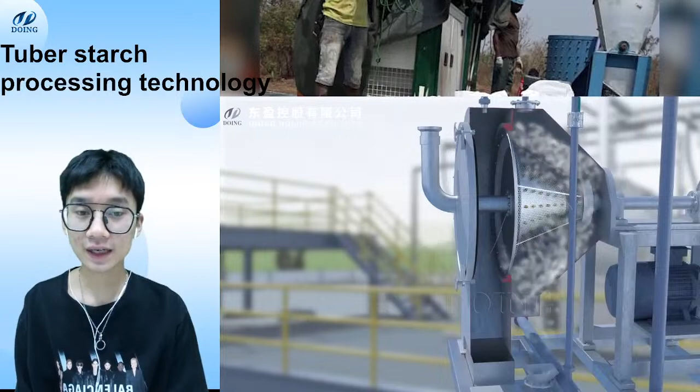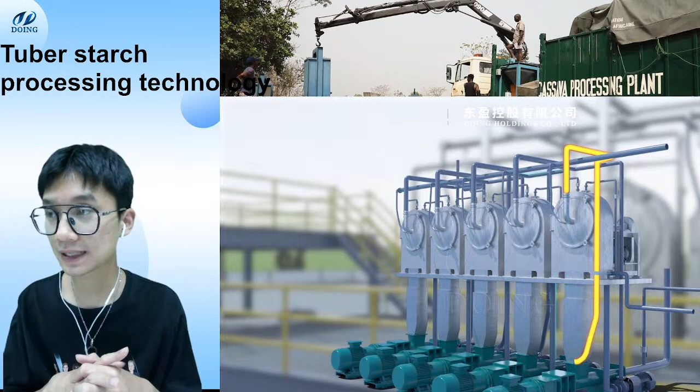Two weeks earlier, we started showing the 3D videos on YouTube. So if you'd like to check the 3D video that we are showing for our newest processing technology, leave something in a comment here, so that our system will reach out to contact you and show you more detailed information about our processing technology, not only for Gari, but potato starch, sweet potato starch, cassava flour or the Gari processing line.

We have done this business for about 10 years, to be specific, 12 years. And during these 12 years, we have accumulated a lot of experience. So if you are interested in our processing technology, please do leave something in a comment. We are waiting for your questions.

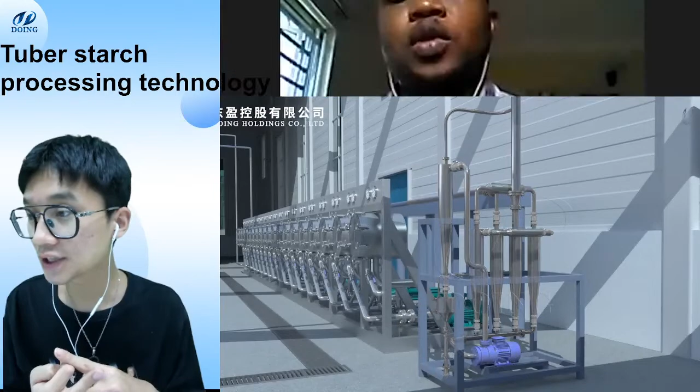And right now, if you are watching the live on YouTube, you can check the 3D video that I'm showing on the right. It is mainly about the whole equipment that we use for this processing technology. If there's anything that you are interested in, you can directly let me know. For this whole processing line, we have it all in stock. For the washing part, the processing part, the impurity removal part, we have it all. And for different raw materials, we do have different kinds of...

Yeah, I am checking the live stream here, and I have already given myself a like. Can I see how many? Hey, Zenram, welcome to the live.

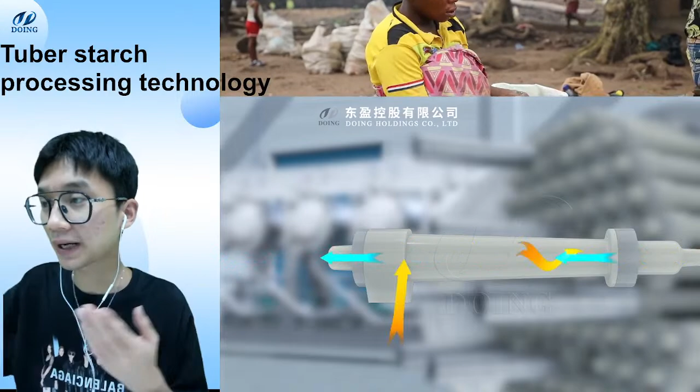This is Oliver from Henan Doing Holdings, and our company is mainly focused on the Gari processing line, cassava flour processing line, and potato and sweet potato starch processing line. So if you are curious about tuber starch, especially potato, sweet potato, and cassava, you can leave something. Our assistant can show you our project cases or the 3D video for our processing technology. We have done the starch and flour business for about 10 years, and we have a lot of experience here.

Could you please tell me what kind of raw materials you have? Potato, sweet potato, or cassava tubers? We can do all of those kinds of business.

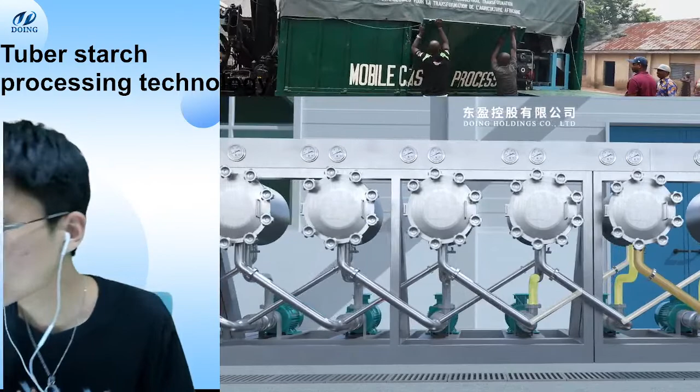And our company is called Henan Doing Holdings, and our company and our factory are all located in Henan province in China. But we do have our overseas office, which is in Nigeria. So if you are living in those kinds of areas, especially Africa, you can save a lot of shipping cost, I'm sure.

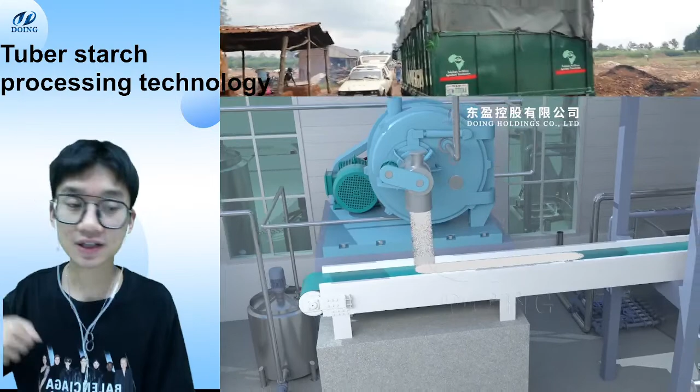So right now, how about we start from the beginning and show you guys what kind of raw materials we have here. Oh, hold on a second. Yeah, this is much better.

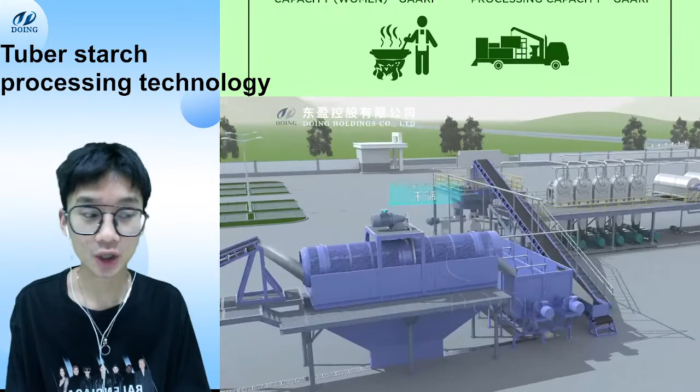Our company is in China, so that's our factory. And we have two factories in total. The total area is about 40,000 square meters, with more than 200 workers producing the equipment for you guys. No matter what capacities or equipment you need, we can provide that.

And this is our check on the right part. This is our cassava starch processing technology, or if you want to know about the potato or sweet potato starch processing line, tell me in the comment area.

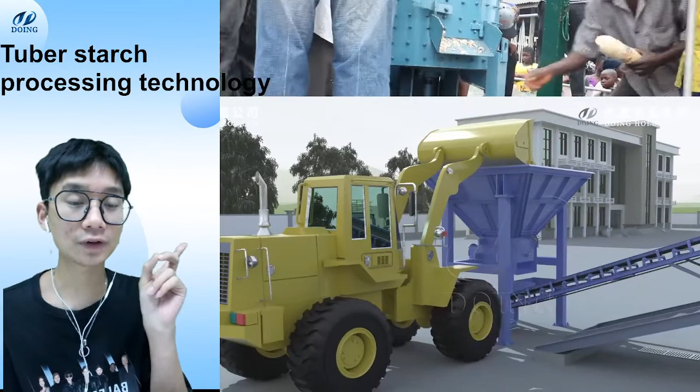So this is the first step. Let me just stop here. You guys can see this one. It is our feeding hopper. At the bottom, there is a vibrating device. When it is working, it keeps vibrating to put all of the raw materials onto this belt conveyor, so that we can make sure all of the raw materials get into each piece of equipment at a certain speed, and to ensure the final starch obtain rate.

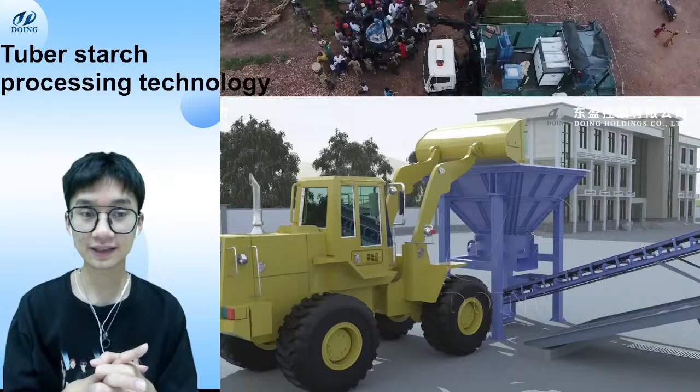And you guys can see here at the bottom part there is a device. It keeps vibrating to put all the raw materials onto this belt conveyor. And this is the first equipment that we use, and then it is our belt conveyor.

Especially for this belt conveyor, you guys do not need to worry about the friction, because we have done the starch business for about 10 years. During these 10 years, we accumulated so much feedback and so many previous cases. I mean, if the friction is not enough, all of the raw materials will fall off this belt conveyor really easily. So in these 10 years, we updated our device several times. Right now, it has really strong, really large friction to make sure all of the raw materials can go into the next equipment in the process.

And then you guys see this one. This is our dry sieve. Can you guys see this one? For this dry sieve, it is mainly used to remove the impurities on the surface of the cassavas, potatoes, and sweet potatoes. Because if you are obtaining the raw materials from the farm, there is so much dirt mixed together with the raw materials. So you have to remove the impurities in the first place to ensure the final starch processing quality.

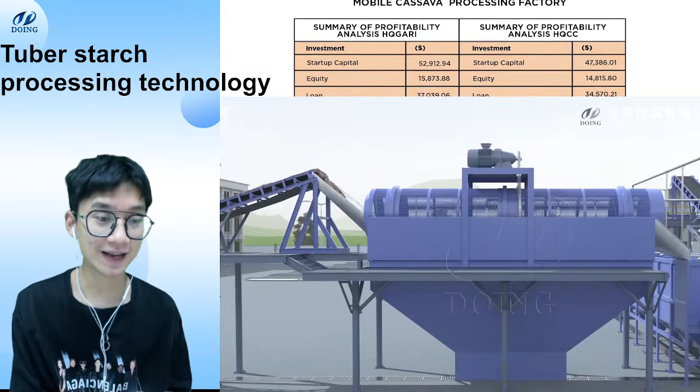So when this dry sieve is working, it keeps rotating to remove the impurities, like weeds, leaves, those kinds of big impurities. And at the bottom part, you guys can see here, this is the outlet for the impurities. So you can use a plastic bag, or whatever, or if you want, you can directly use a garbage bin to collect the impurities. When it is full, you can easily remove all the impurities. A really high efficiency one, simple structure, and yeah, this is our dry sieve.

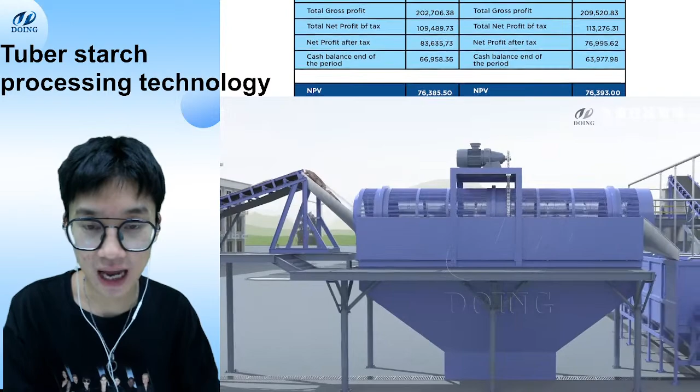This is our paddle washing equipment. It is mainly used to remove impurities for cassava and this kind of raw material. If you have potato or sweet potato as the raw material, this equipment is not that suitable, because it is more suitable for long and thin raw materials like cassava. If the raw material is big and large, it will easily damage it, which we don't want to happen. So we set one of the paddle washing equipment here. It is suitable for that.

You guys can see at the bottom, on the right part, there are two slots, one slot and two slots. According to the dirt adhesion degrees, or according to the washing difficulties, you can easily make it into a single slot, double slot, or triple slot, multi slot. It is totally according to your needs.

If your raw material is dirty, obtained directly from the farm, from the farmers, you may need to use the paddle washing equipment. But if you directly purchase the raw material from other sellers, this kind of equipment is not that necessary. So if you'd like to know the exact price for this whole processing line, it totally depends on what kind of raw materials you have, and what is the requirement for the final quality, so that we can give you a customized design according to your basic information.

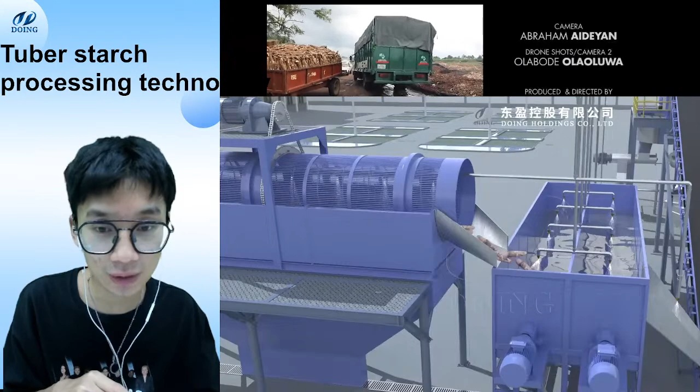Anyway, let's keep going. Let's show more details for the paddle washing equipment. For this paddle washing equipment, you guys can see at the bottom there is a bottom notch. It can easily separate the fine sand, because the fine sand's gravity, the weight, is totally different from the cassava tubers. And also there is a stone sink design.

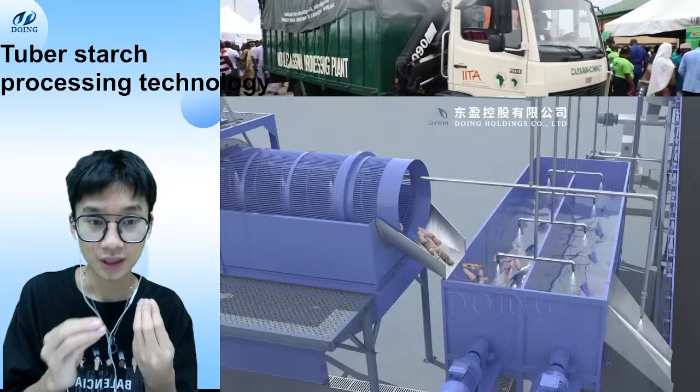By the way, for this paddle washing equipment, it totally adopts the counter current washing principle. What do I mean by counter current washing principle? There are two kinds of valves set at the bottom of this equipment. So we normally will turn on one third for the inlet part's valve, so all the water will flow to the inlet part, but our raw materials flow from the inlet part to the outlet part. So adopting this kind of working principle, we make it into a counter current equipment here.

According to the dirt adhesion degrees, according to the washing difficulties, we can make it into single slot, double slot, or triple slot according to your needs. So if you need equipment to wash cassava tubers, this one is really suitable for you. Or if you have any questions about our tuber starch processing technology, easily leave your question in the comments.

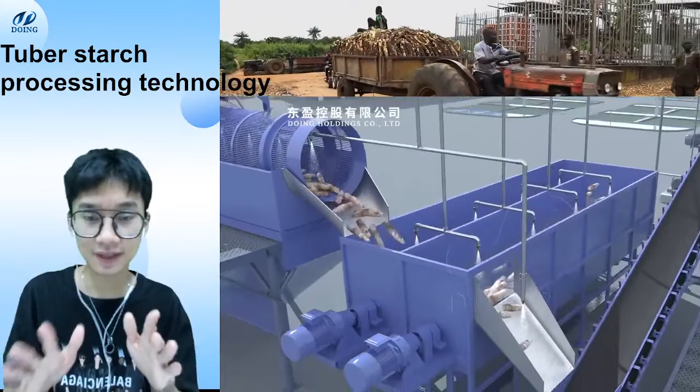That is basically all for the washing part. From now on, it is about the processing part. For the processing part, we are using two of the machines: one is this cutting machine, and one is called a rasper. Let's see the cutting machine first. If you do have any questions, let me know.

So this is our cutting machine. Can you guys see that? This is our cutting machine. When it is working, there are two kinds of knives. It keeps rotating. The first one is a rotating knife. It keeps rotating to cut all the raw material into small pieces, normally around 3 to 5 centimeters.

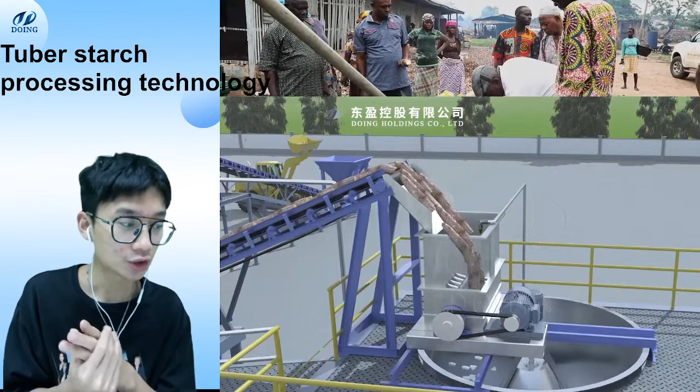And the knife, we are using a really durable material, which is 4Cr13. It is a really durable material. We usually use this kind of material in our kitchen to cut fruits and vegetables. Very durable, and it has a diamond knife design.

Let me show you about it. Some clients may give us feedback that when it is cutting, all the raw materials will easily jump out of this cutting machine. So right now we have a really special design - we have paddles inside of the cutting machine, or if needed, we can design a cover on the outside for this cutting machine to avoid the raw materials jumping out when it is getting cut.

And then it is our rasper. By the way, for this whole processing line, the starch rate is above 94%, and especially for this rasper, the breaking rate is about 96%. Let me show you why it has such an amazing breaking rate.

Yeah, this is our rasper. There is a really huge rotary drum inside the rasper. If you have a large capacity, a large scale of raw materials to process, the bigger this rotary drum gets, the diameter of this rotary drum will also get bigger. And on the surface, there are multiple blades.

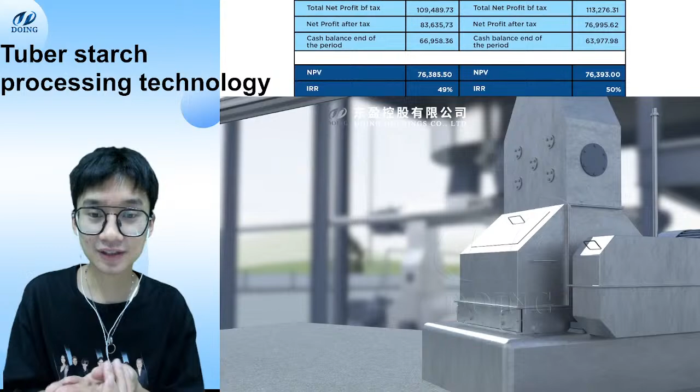In the market, there are so many different kinds of breaking equipment, but the breaking rate is not that high - normally it is around 80% or 82%. The most high efficiency one is about 85%. But for our rasper, the breaking rate is totally above 96%. Let me give you an example, a really exact example that we did before.

There is a Nigeria client. Due to his limited budget, he had to choose the hammer breaker instead of this rasper. With 4 to 6 tons of raw materials, he can process 1 ton of tuber starch. But with our equipment, our rasper, you can use just 4 tons of raw materials to obtain 1 ton of tuber starch. You guys can do the comparison, so yeah, it does differ a lot.

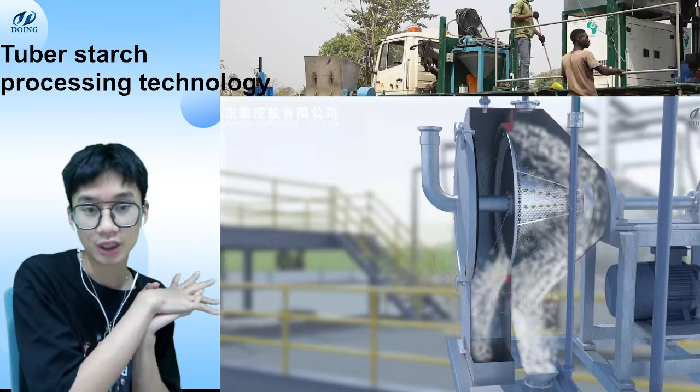And the next equipment is our centrifuge sieve. Let me show you more detailed information because for this one, oh my God, there are so many of our clients who love this centrifuge sieve. It is really a high efficiency one. The purpose of this one is we use this equipment to remove the big fibers inside of the cassava milk, because after processing there are a lot of fibers mixing together with our cassava milk. So we better remove all of the big fibers to improve the final quality of our starch.

So this is what we use. In the market, there is a totally different type. Let me show you our equipment first and then show you the other company's equipment so that we can do the comparison, because it does differ a lot. For our equipment, you guys can see here, it rotates at really high speed. In 1 minute, it can rotate more than 1,200 times. Over here, can you guys see that at the outlet part? At the outside there is an inlet part, an inlet pipe. All of the cassava milk will directly get into this centrifuge sieve through this part, and in the centrifuge sieve there is a mesh.

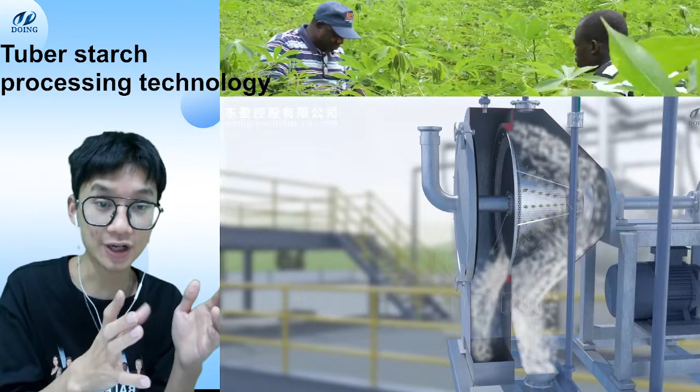Hey Mario, how are you, Mario? Good afternoon, welcome to the live. This is Oliver from Doing Holdings.

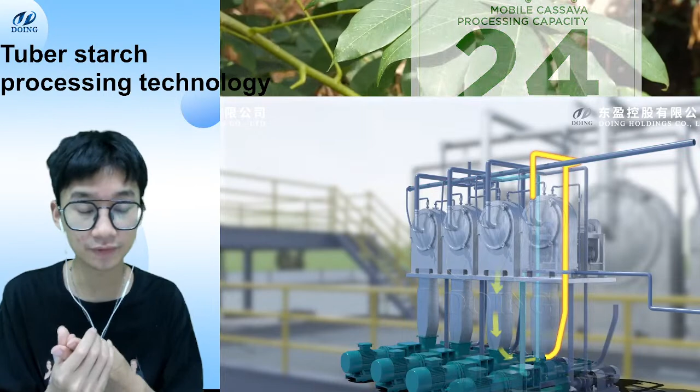This is our first equipment, the second one, the third one, and the fourth one. If you have a large scale, you can easily make it into four or five of the equipment. It's totally according to your needs and your preference. The more equipment you have, the more impurities and fibers you can remove. But according to our 10 years of experience, 4 or 5 is totally enough. You can save a lot of budget, and you can remove most of the impurities. 4 or 5 is all suitable.

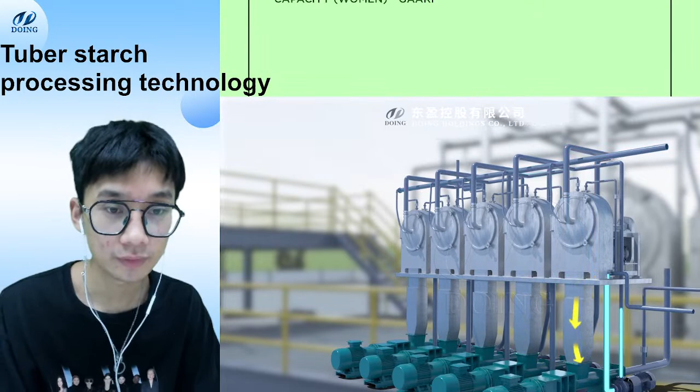In this video, we are using 1, 2, 3, 4, 5 of the centrifugal sieves to remove the fiber impurities. And they are connected to each other; you can see there are 2 kinds of pipe here, a yellow one and a blue one. Inside the blue one and the yellow one, there are totally different things.

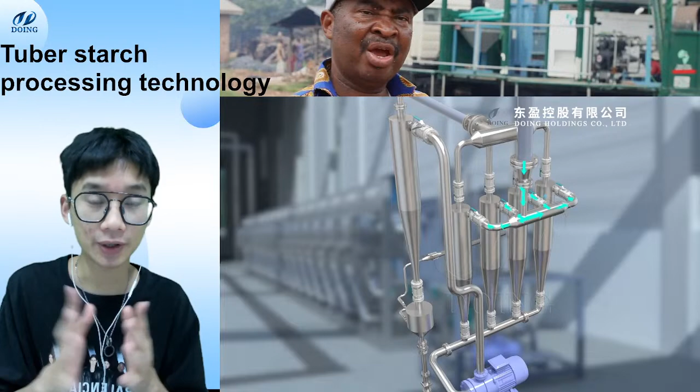And right now, check this one. This is our desander. Due to the different weight of the fine sand and our starch, we can use gravity to remove the fine sand. The fine sand is relatively heavy, so it will go out of the desander at the bottom part. And we are using several desanders connected to each other as a bundle.

And the next one, ladies and gentlemen, check the next one. This is our hydrocyclone station.

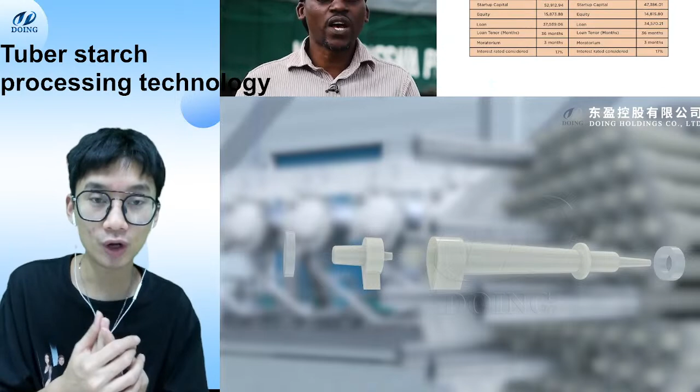And let's see the inside of the tubes. There are two sizes, can you see? A bigger one and a smaller one. We are using this equipment mainly to remove the cells and other tiny impurities. When we put all of the starch into these tubes, the force of gravity comes into play, and the heavier part keeps swirling and is removed at the bottom, while the cells go out of these tubes at the top part. This is what we do to remove the cells.

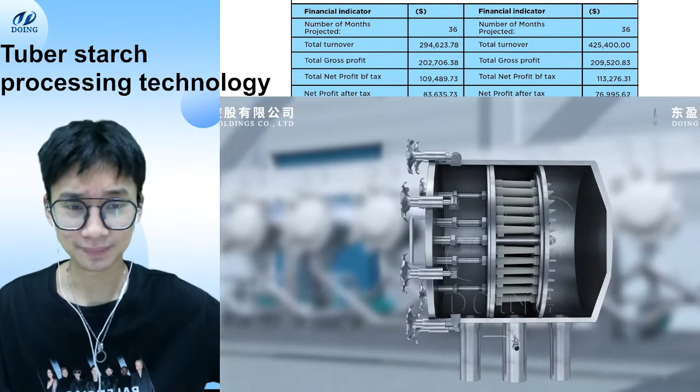And for this equipment, just like I said, all of the starch gets into the equipment at the middle part. The left part is the impurities outlet, and the right part is our starch outlet. And if you have a really large scale, we strongly suggest you have 18 or 19 hydrocyclone units in the bundle, so that we can remove all of the cells to improve the color and the final starch quality. Check it out.

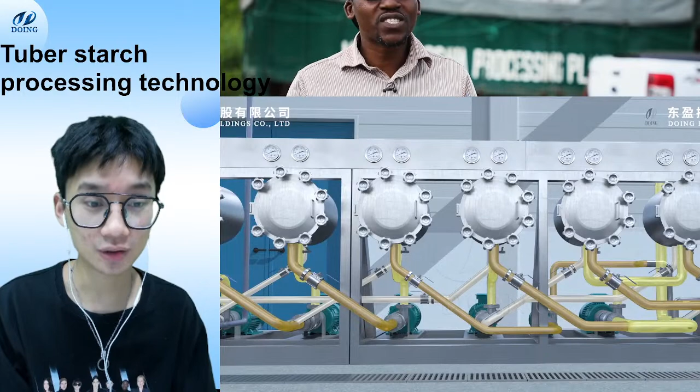刚才直播间这儿有6个。So according to our 10 years experiences here, we strongly suggest to you guys to get 18 or 19 of the hydrocyclone station at the bundle, so that we can remove most of the impurities, remove most of the cells, so that we can improve the colors to make sure the final quality can meet the requirements for the national standards.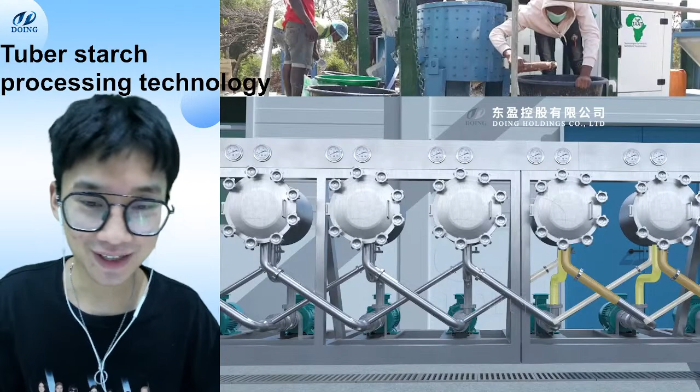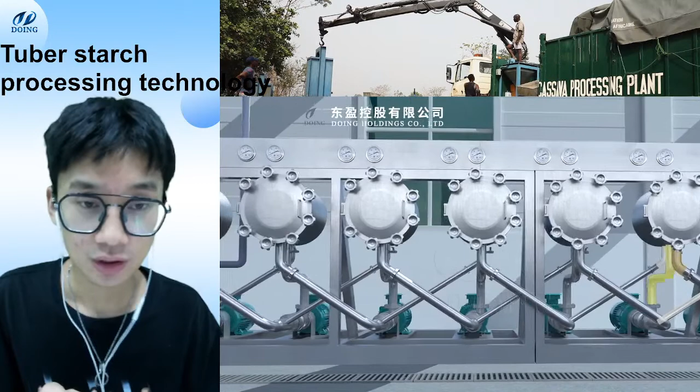And let me show you guys about the material for all of the equipments. When our equipments get in touch with the starch, with the raw materials, we are using 304 food grade material. Do not worry that the materials will easily get rust, and when it is rust, it will totally damage the final quality. Do not worry about that, because we are using 304 food grade stainless steel. And especially for this hydrocyclone station, all of the pipes and all of the equipment that we are using here, it is 304 food grade stainless steel. It will not rust easily.

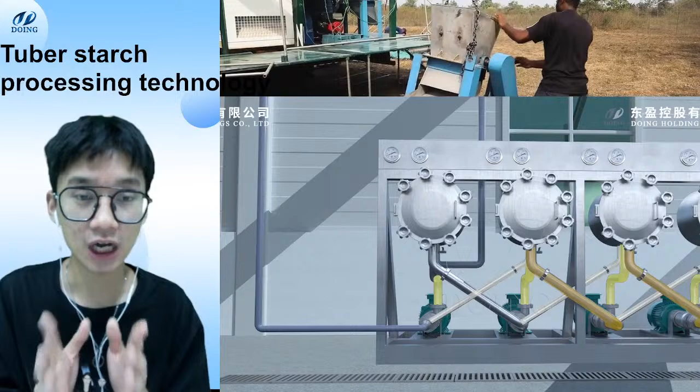And inside of the equipment, there are so many pipes here. All of the tubes we are using are also food grade. In the market, there are a lot of people who use the plastic one. If you want, of course you can use the plastic tubes. The cost is low compared to our equipment, but the service life is shorter, a lot shorter than our materials.

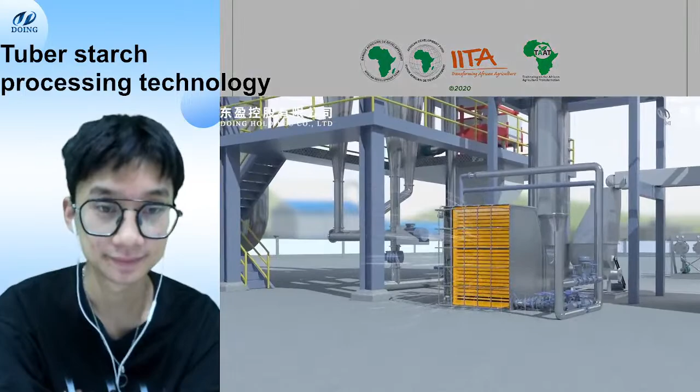And after this part, it is our vacuum dryer. I don't think it is a vacuum dryer. Yeah, it is our drying system. Check about it. You guys may notice the size of our pipe, it is totally different. When the wet materials get into this flash dryer, exactly, flash dryer, it will flow to the outlet, and the pipe is specially made, because you guys may notice the size is totally different from the other companies. Like the bigger part, smaller part, bigger part, smaller part.

Why we design our pipe just like this? It is because by using this kind of pipe we can prolong the drying time for the drying part, because otherwise the materials cannot meet the standard for the national requirements. So we design our equipment just like this to prolong the drying time.

And by the way, it is totally under pressure, because if we're not using the under pressure, when we're drying, when we're blowing the raw materials, it will easily get out of the pipe when there is a tiny hole, because all of the pipes are connecting to each other. If there is a small hole, all of the starch will easily fly out, which we don't want to happen. So inside of the pipe, it is totally under pressure, and we put our blower at the bottom part to bring the under pressure.

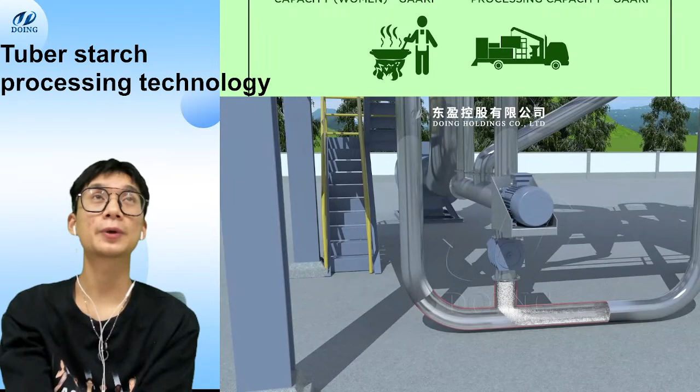The temperature in this flash dryer is normally around 70 degrees, or even higher like 80 degrees, or 60 degrees. It is totally according to your basic information and the real situation. Yeah, and that is our sieve. We just add one sieve at the last equipment so that we can filter out all of the non-high quality starch.

This is basically what I'm showing here about the cassava starch processing line. Or if you guys want, let's check another potato or sweet potato starch processing line. Yeah, let's check it. This is our sweet potato starch processing line. It is a really popular video, and if you are our old followers, you may notice the 3D video that we have been showing right now. We have already shown it several times.

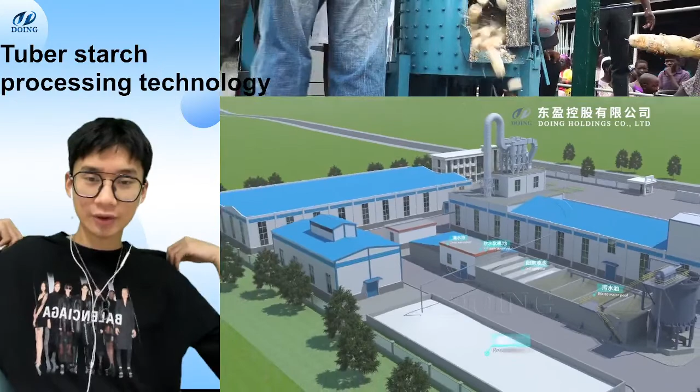Or if you'd like to know about the price for our equipment, or about the capacities, because according to your different scales of raw materials, we do have different capacities. One ton per day, 5 tons per day, 10 tons per day. We can all provide you high quality equipment. So if you do need it, name it in the comment area. We can provide you the best quality equipment, ladies and gentlemen.

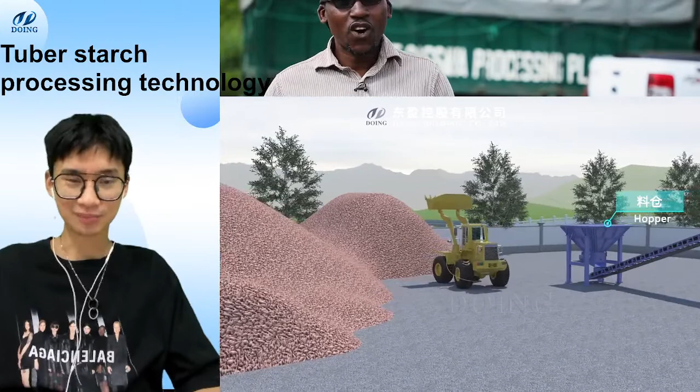Ladies and gentlemen, oh my god, I haven't seen a lady for a really long time in the live stream. Hey Omar, how are you? Good afternoon. Welcome to the live. This is Oliver from Henan Doing Holdings.

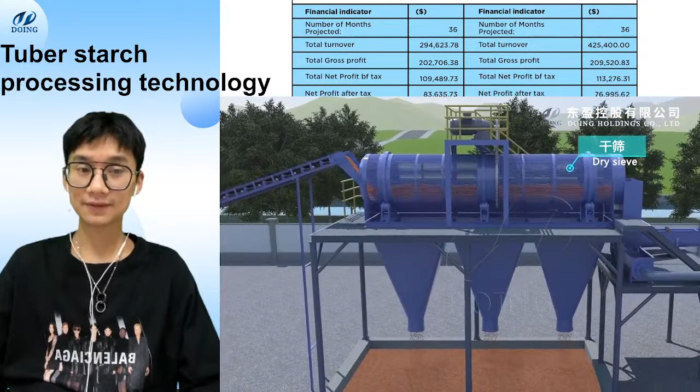You are preferring Zhengzhou Hongle machinery equipment. And by the way, I am also from Henan province, and our company is also in Zhengzhou. Currently, we are showing you the tuber starch processing technology, especially for potato, sweet potato, and cassava starch. But also, if you'd like to do the gari business, we can also provide you the gari processing technology, no matter for the single equipment or the whole processing line. We all have it in stock.

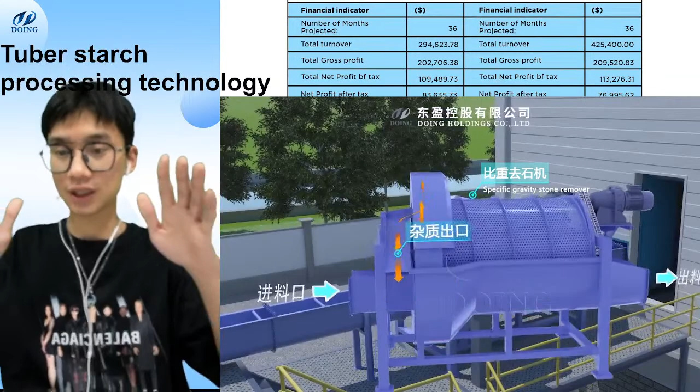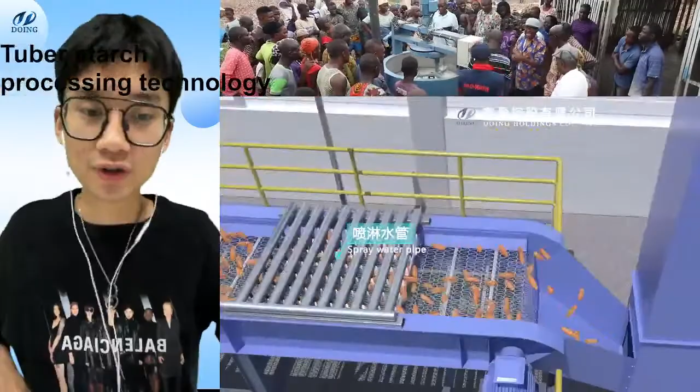We are the company to provide you guys the machinery equipment. No matter what capacity of equipment, we can provide it. Like 1 ton per day, 10 tons per day, 15 tons per day, 20 tons per day. We all have it in stock. If you need it, you name it, we can provide you the best quality with a relatively low price. And what kind of machinery equipment do you provide? If you can share with me what kind of machinery equipment you have. We are doing the starch business, flour business and gari business.

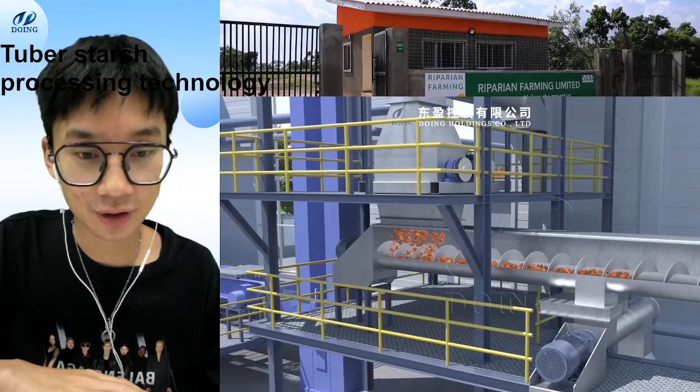Let me just pause it here to show you more details about our processing part, because this is the main part in this whole processing line. We do have two pieces of equipment here. One is our cutting machine. You guys can check. This one is a rotary knife.

When it is working, it rotates at a really high speed to cut all the raw materials into small pieces, normally around 3 to 5 centimeters, so that we can rasp all of the raw materials in a really efficient way. And at the bottom there is a stable knife which just stays here. It is not moving. So when the raw materials drop down, the knife can cut them again. And the knife is made of 4CR13. 4CR13 is a really durable material.

I mean, by using this kind of material, you can deal with more than 3,000 tons to 5,000 tons of the things without any questions.

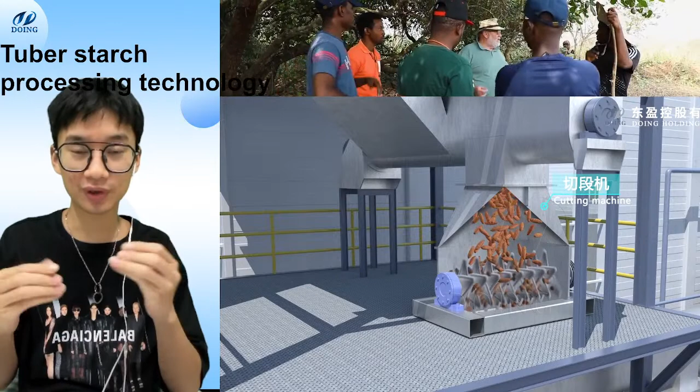And then after this cutting machine, in the real situation, all of the raw material will easily jump out of the equipment, because it is really high speed. The knife is rotated at a really high speed, so when the raw material gets in touch with the knife, it will easily jump out of the equipment.

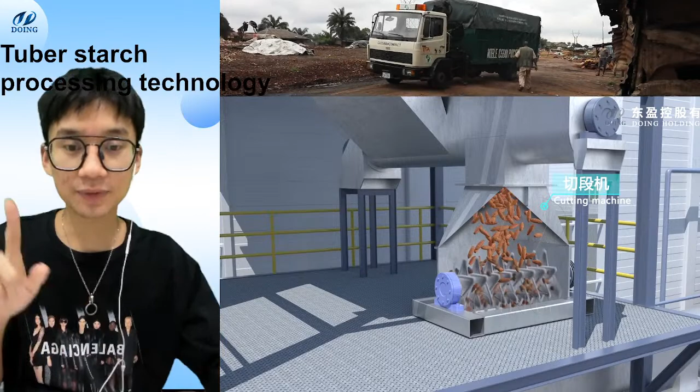And then let me show you the next equipment here. It is our magnetic separator.

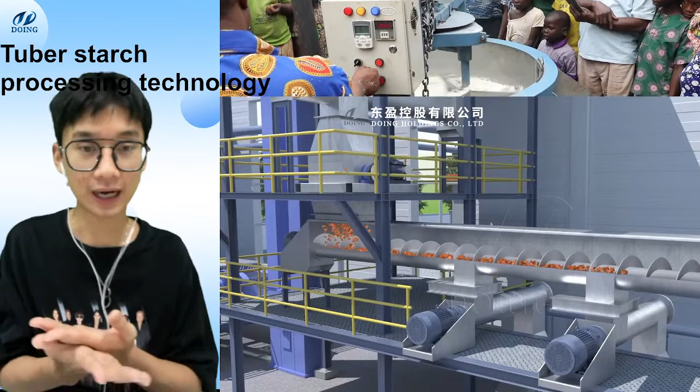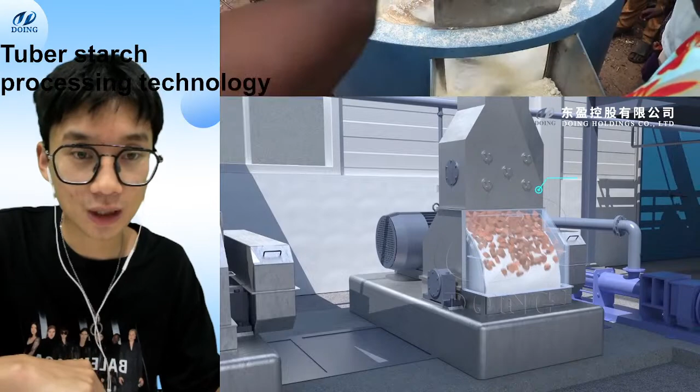But for our rasper, the breaking rate is totally above 96%. Really high efficiency, but the price is a little more expensive than other companies. Let me give you an example so you know how important the breaking rate is. About 2 years ago we did a project for one of our clients from Nigeria, and due to the limited budget, he finally purchased the hammer mill, with a breaking rate of around 80%. So with 5 tons or 6 tons of raw material, he can process 1 ton

of starch. But with our rasper, to get 1 ton of starch, you only need to use 4 tons of raw materials. Do the comparison. He's using 5 tons or 6 tons to get 1 ton of starch. But using our high-efficiency equipment, with 4 tons of raw materials you can get 1 ton of starch. You can save a lot of money.

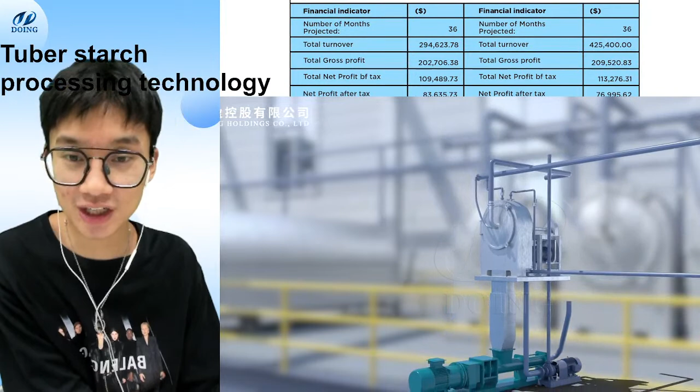And currently what I'm showing here is the centrifugal sieve. It is our centrifugal sieve.

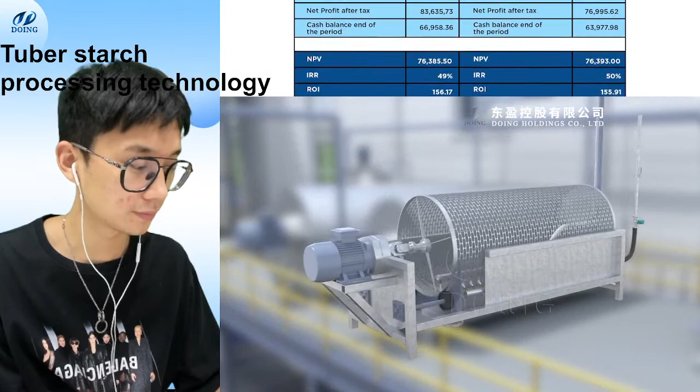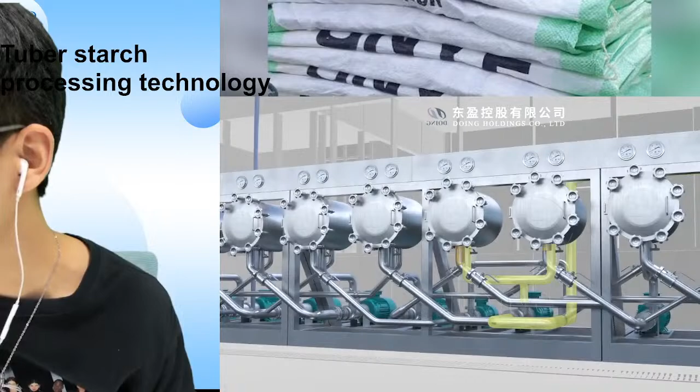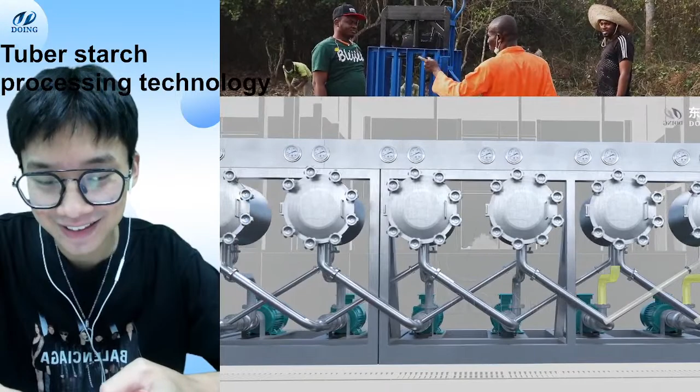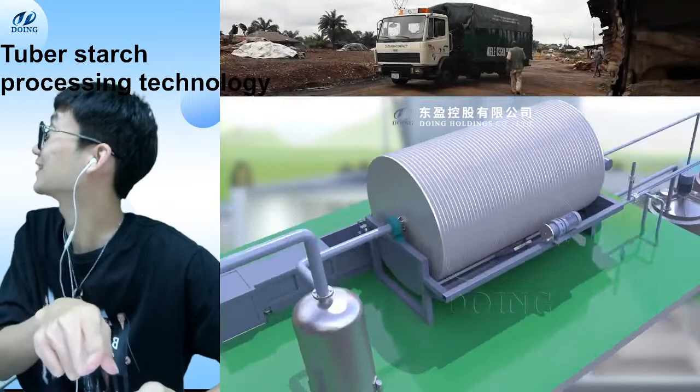郑州红了. Let me Google 郑州红了, because he said his buying preference is 郑州红了. Let me check what it is. I'd like to know more about the company. How do you write the characters? Oh, I get it. 郑州红了 machinery. Let me check. Oh, it is a packaging equipment company. Yeah, this is you. We have the same founding year, we both started the company in 2011. It is really close. Do you need any live streamer? Yeah, it is really close to our company.

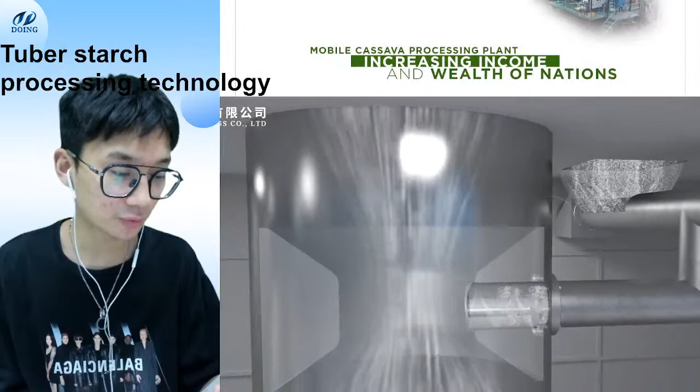So, do you have any interest in starch processing machines?

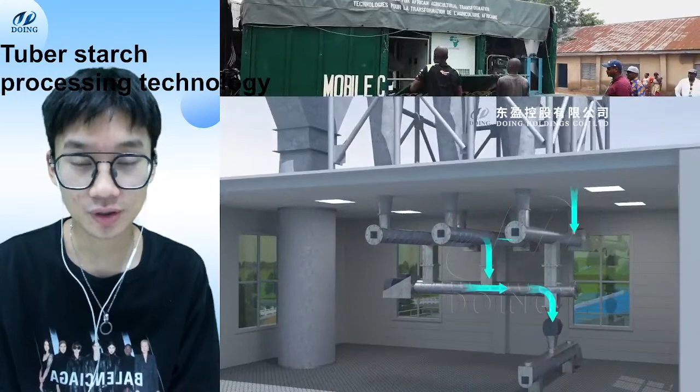If you're also curious about the starch business, if you already have a starch processing line, if you already have your own starch workshop, we can provide you the best quality equipment according to your needs. We have all capacities of equipment like 1 ton per day, 2 ton per day, 5 ton per day, 10 ton per day, or even bigger capacities. We have it all, so if you do need our equipment, easily leave something in the comment.

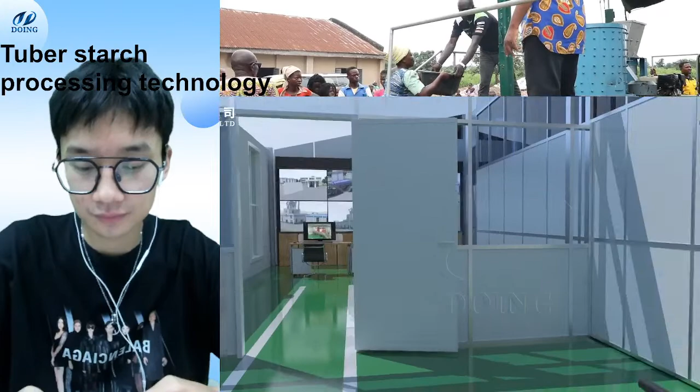Okay, I will add it right now. Okay Anson, I'm waiting for you, we are waiting for you. So after you add our WhatsApp number, you can tell us what do you need, what kind of raw materials do you have, and how many hours do you work for one day, so that we can give you a customized design according to your basic information, Anson.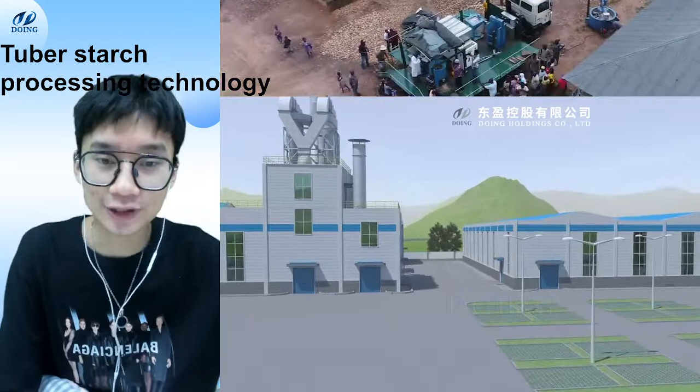Waiting for you. And where do you want to set up your workshop? I mean currently we are in China, but we do have our overseas office. So where do you want to have your workshop?

Nigeria, that is so good because we do have our overseas office which is in Nigeria also. I believe you guys can save a lot of shipping cost and you will be totally satisfied with our equipment. So yeah, add our WhatsApp number and tell us what you need, what kind of raw materials you have, and what is your final requirement for the starch, so that we can give you a customized design according to that.

If possible, can I know your WhatsApp ID?

Ladies and gentlemen, if you do have any questions or if you do have any needs for our equipment right now, please directly let me know. We are doing the starch business, especially tuber starch - cassava, potato and sweet potato starch business - for about 10 years. During these years we have accumulated so many feedbacks and proven cases.